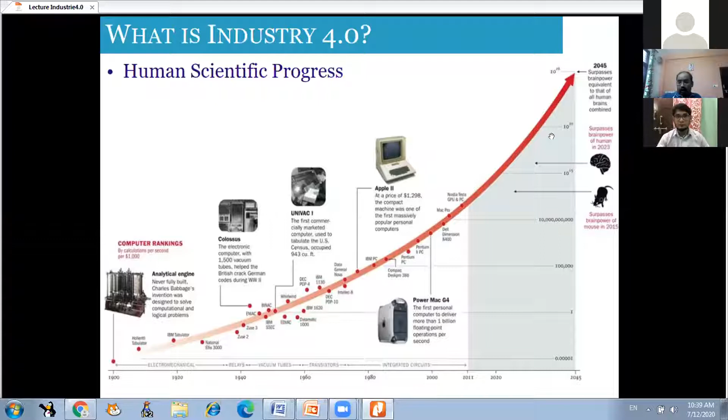So starting from the industrial revolution, we begin with Industry 1.0. What is that? It is the first industrial revolution - that means the first mechanical loom. That was a mechanical loom engine developed in 1784, invented by Edmund Cartwright, a scientist from England.

Started the first mechanical loom system based on the introduction of mechanical production equipment driven by water and steam power only. This is our first industrial revolution, developed by a machine known as the first mechanical loom, developed in England. Now as we proceed, because there are some limitations, we have to achieve efficiency.

We have to minimize the losses, etc. Then as we move on, there was a second revolution. We call it Industry 2.0, based on the mass production achieved by division of labor concept and use of electrical energy. So as we move from first to second industrial revolution, the mechanical energy converts into electrical energy. All the machines we developed were in terms of electrical energy for the mass production of products or articles.

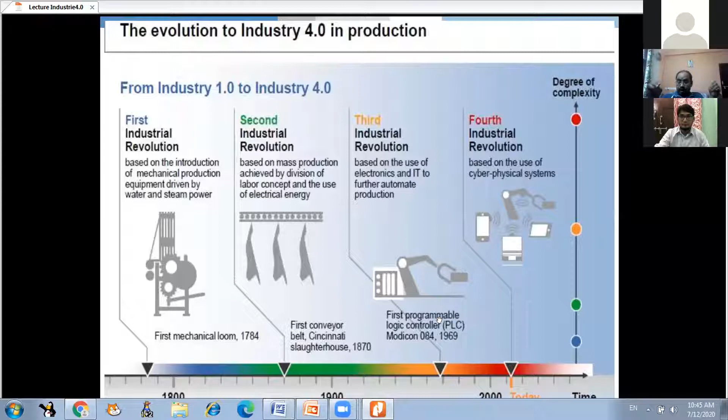Now in the fourth industrial revolution, everything is interconnected, whether you are sitting on the remote side, or you have a smartphone, you have the internet, you have the machine. That means more complexity we have to deal with, more problems we have to deal with in the fourth industrial revolution. Apart from that, it is very useful for the country, for the world, for sustaining the economy of the world.

That is what Industry 4.0 is.

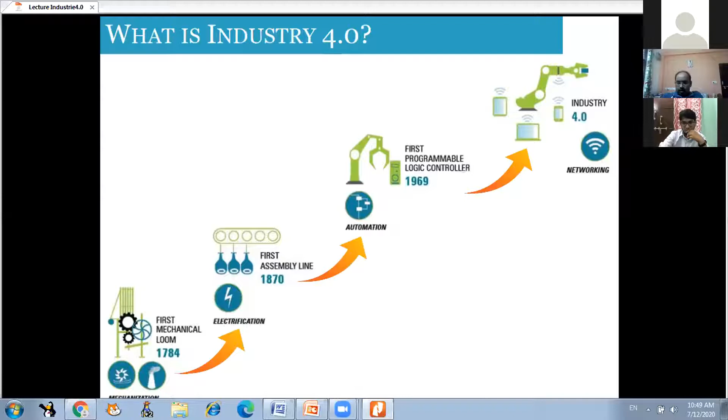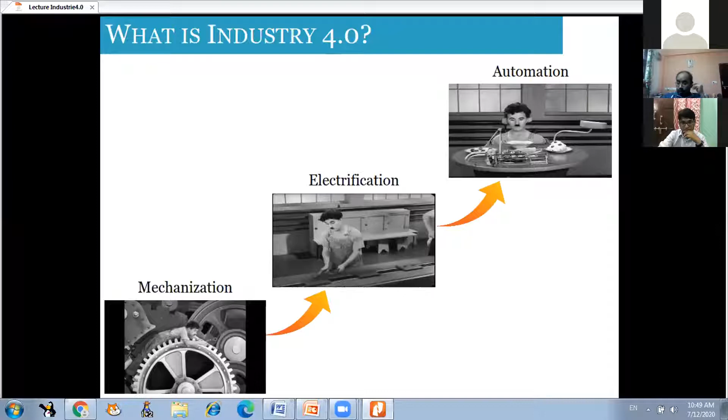Now what does Industry 4.0 mean? Mechanization starts from mechanical work, that is the mechanical loom. Then we shifted to electrification. Then we shifted to automation, Industry 3.0. But now in Industry 4.0, we are shifting to the cyber physical system, the interconnectivity of the cyber physical system.

What is the need for Industry 4.0? It's a heavy need in industry because India is a developing country, and we have to sustain in this economic world. We have to compete with other countries. Other countries started using Industry 4.0 in 2015, and we launched it in 2019, after 4 years, because we have to compete with all countries in order to sustain our share of the world's economic growth.

Why do we need Industry 4.0? Because of shorter lead time and product life cycle. Lead time means the time between initiation and completion of a production process — the time needed to start and end production. We have to shorten the lead time in order to make the industry more efficient and quicker, and we also shorten the product life cycle.

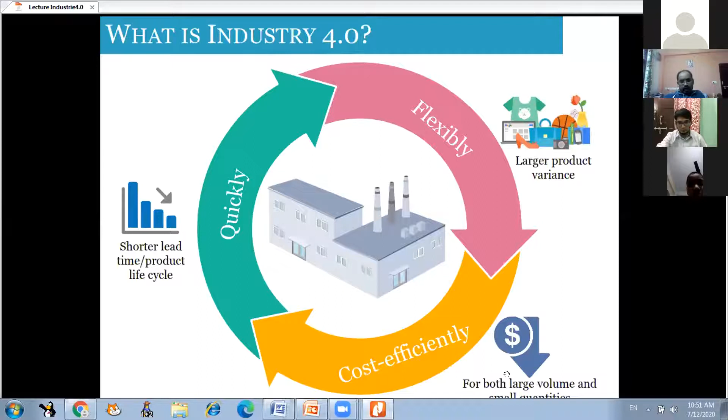Larger product variance for both large volume and small quantity require Industry 4.0. This is the framework of Industry 4.0: digitalization, automation, connectivity, and analytics. We have to club together what the customer needs. It is directly connected with the suppliers, manufacturers, and logistics. Whatever the customer needs, there is a direct demand sent to the manufacturer, who manufactures the product as per customer requirement. The customer can also monitor the progress of whether the product is being manufactured as per their need.

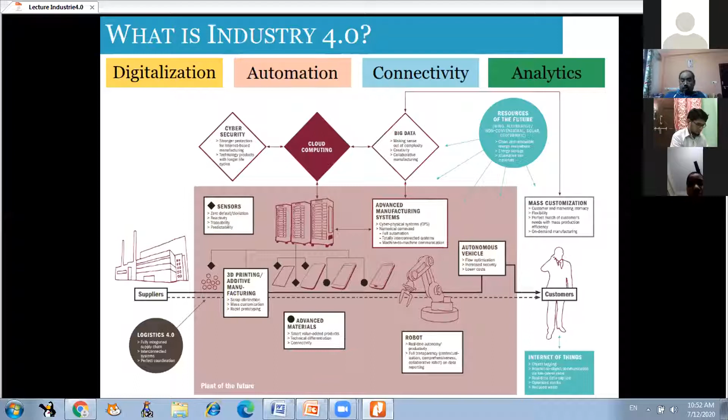There are so many concepts, including cyber security, cloud computing, big data, and advanced manufacturing systems. All the systems are interconnected in Industry 4.0, so we have to club all these concepts together.

Now we have a classical five-layer automation architecture. We have the sensor and actuator at machine level, which sense a command and actuate it via actuators - this is the machine level or station level, using PLC, the programmable logic controller. Then cell level uses SCADA, supervisory control and data acquisition. Then process level uses MES, the manufacturing execution system, at the process control level. Then we have the factory operation management level, using enterprise resource planning.

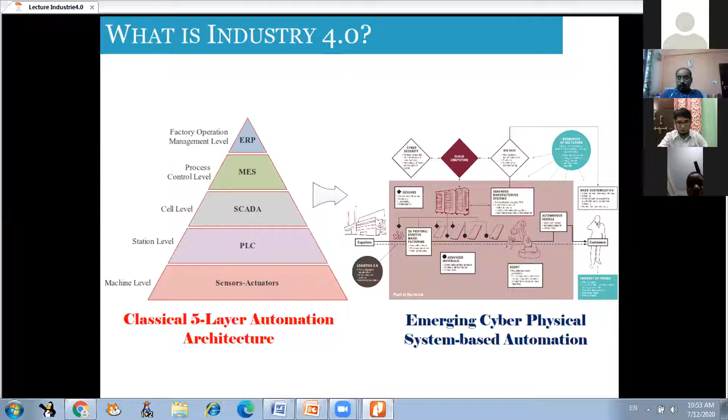All of this is connected with emerging cyber physical system based automation - we call it emerging cyber physical automation. Everything is connected with the cyber physical system. So this is Industry 4.0.

That means smart machines, service robots, advanced analytics, smart factory, big data, and IoT are all components of Industry 4.0. We need IoT, big data, smart factories, advanced analytics, service robotics, and smart machines.

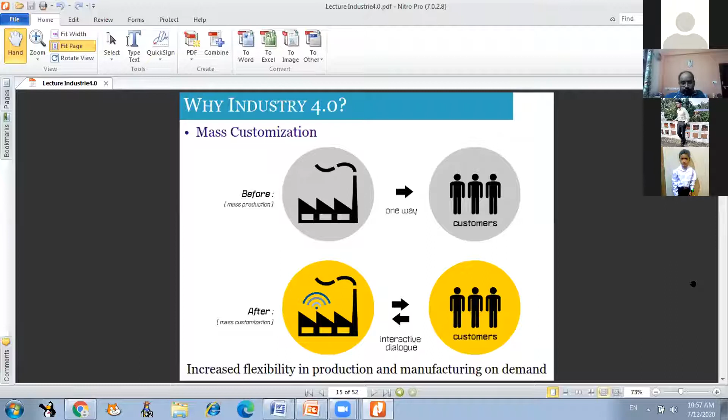Earlier, mass production was one-way to the customer - whatever products the industry produced, they just shifted to the customer. After mass customization, it's an interactive dialogue with the customer - whatever the customer thinks, they can achieve as per their requirement. That means increased flexibility in production and manufacturing on demand. Whatever the demand of the customer, we can go by flexibility. We have to achieve increased flexibility in Industry 4.0 for faster production.

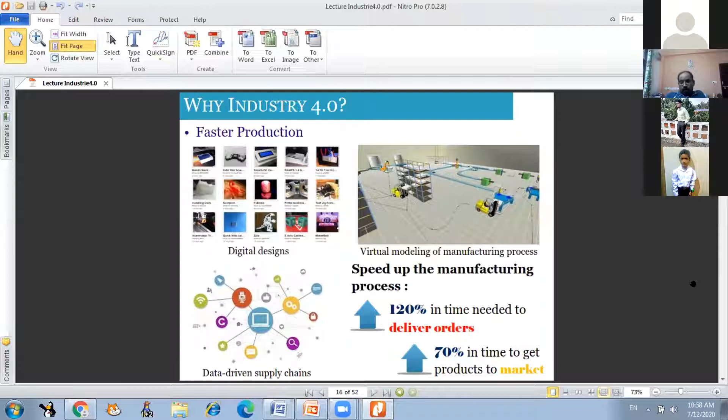This is a simple example of faster production: 120% increase in time needed to deliver an order, 70% increase in time to get products to market - this is an analysis from some person. It's just a forecast that if we implement Industry 4.0, we can speed up the manufacturing process and reduce time to get products to market by 70%. So Industry 4.0 means better quality too - you can see the number of defects per million units: in 1989, suppose 500 defects; in 2015, after Industry 4.0, just 12.

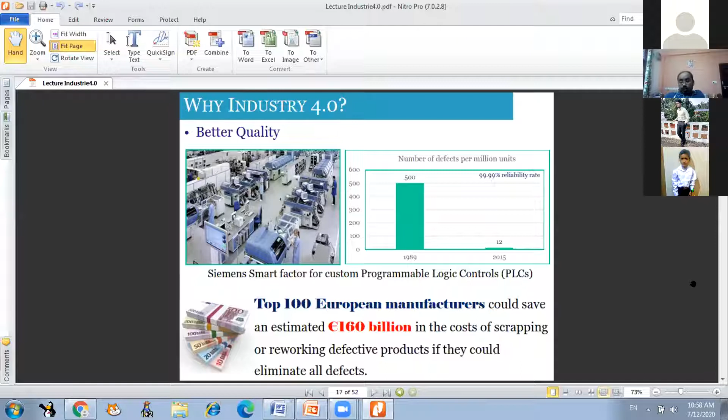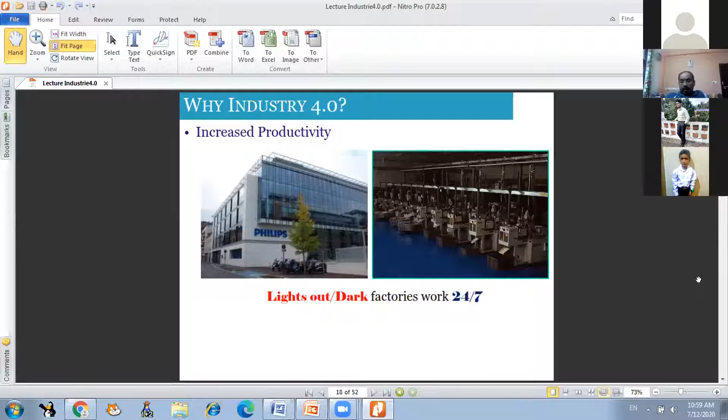99.99% reliability rate - this is the Siemens Smart Factory for custom programmable logic controls. That is Industry 4.0. Better quality we can achieve. Increase productivity, light out dark factories work 24/7. Light out and dark factories means it is fully automatic industry without any involvement of the worker, involvement of humans. That is unmanned industry. They can run 24/7 for increasing the productivity.

Predictive maintenance, it is very important. Increase productivity, that is what we can say Industry 4.0. Main issue in the earlier industry 3.0, 2.0 is that we have to halt the manufacturing for the maintenance, and if you're halting the manufacturing line, then obviously there is loss of productivity. But that loss we can overcome in Industry 4.0.

The machines are interconnected with each other, and if you have a line of machines, one machine can sense what is the error in some parts of the machine, they can self-repair the error, self-repair the wear by changing the tool, by changing the part, so that they can maintain themselves. So in this predictive maintenance, they avoid machine failures on the factory floor. That is 50% decreased downtime, 20% increased production, and it is called predictive maintenance.

In Industry 4.0, all machines are interconnected with the cyber world, physical system cyber world. So they can sense whatever is required for the machine for smoother, continuous flow, and they are interconnected. If one machine can sense the breakdown, then automatically all the machines will be stopped until the initial machine can recover itself. So it is a sharing economy, Internet of Things.

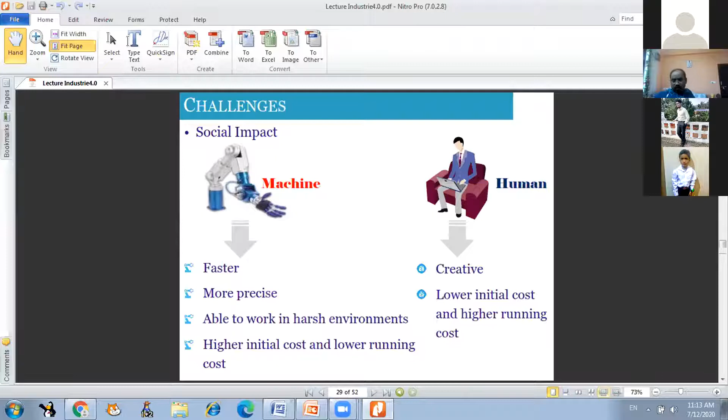Now this is Internet of Things - smartphones, for example. Everything gets smart by 2025 in India. We have smartphones now, smart homes maybe in 1 or 2 years - some already have smart homes in big cities, metro cities, smart cities. Now we will have smart cars, we have smart factories. So we have to push the technology and pull the market as per the world scenario and world economy to survive in the world. Everything will be smart.

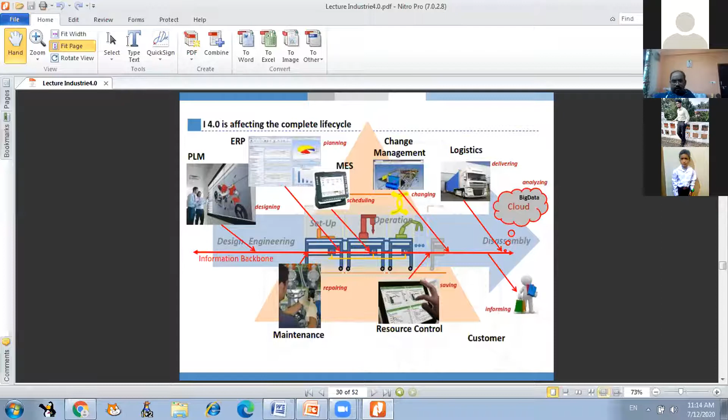This affects the complete life cycle - these challenges have already been discussed. Smart products: the product to be manufactured has all necessary information for every step of its production. That means we have smart products.

Can you imagine that if we have to fill a jar with 2 liters of liquid in a machine, we have a chip in the jar that can sense itself whether 2 liters is sufficient - sense means everything is automatic with some intelligence on it, they can judge. Then we have the autonomous production facility, a network production facility that takes into account the entire value chain, so we have the development phase.

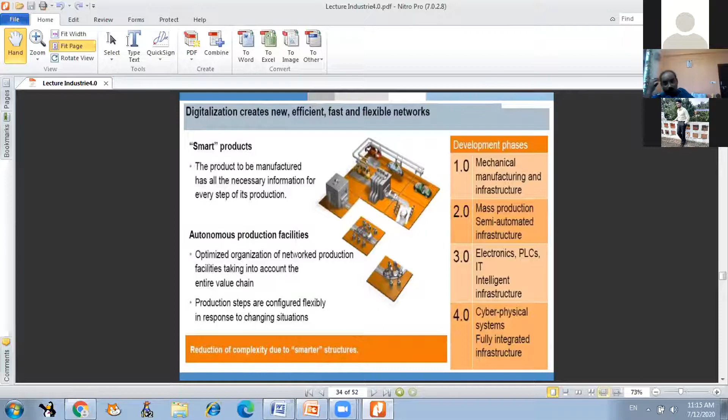It's all discussed. Now coming to our country - why should India invest in this program? It is a very big challenge for our country to sustain in this globalization. So what we need is to stay ahead. We need smart solutions - it's essential for our economy, so we have to sustain.

But what is the meaning of 'we'? We means all of us together, not a single person - we the engineers, we the academicians, we the researchers. We have to work together to transform Indian industry from 3.0 to 4.0, so as to sustain in the world of globalization as per the current scenario.

So we have to change the syllabus structure, we have to change our machines, we have to change our scheme of examination - everything we have to change so that we can train people as per Industry 4.0. India today is in a leading position in production of goods as well as production of equipment.

We must stay ahead. The world market is undergoing rapid changes: labor cost, quality demand, individualized product, shorter product life cycle - that means we need smart solutions. India must keep production in India, or even get production back from low-cost countries. It is very important for our economy.

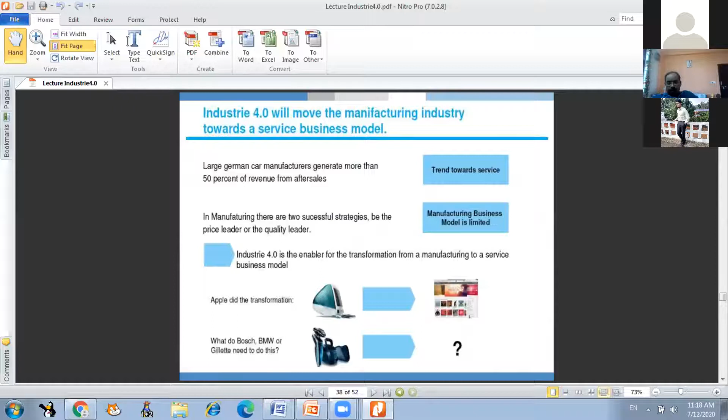Industry 4.0 will move the manufacturing industry towards service business. In service also we can implement it in every field. So Industry 4.0 is not just a word but action.

Smart factory is a similar concept to Industry 4.0, this smart factory concept used in the United States. We call it smart factory. So these are the main things we have to consider.

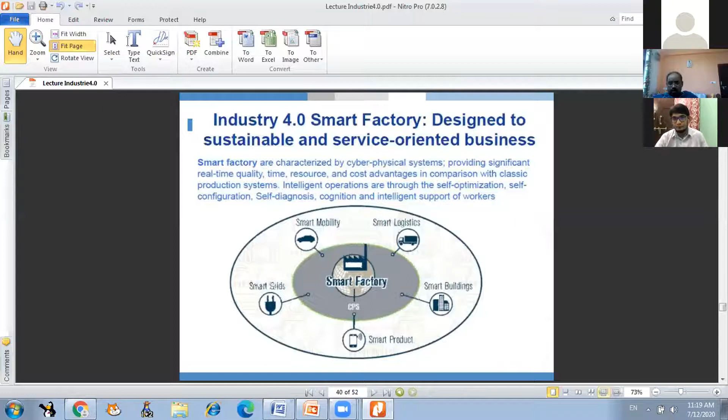It is designed to be a sustainable, service-oriented business. We have smart mobility, smart logistics, smart buildings, smart products, smart grids. Everything should be smart. This is just a view of the smart factory, with no man, no humans.

The opportunity of Industry 4.0 is based on cyber physical systems and internet of things. Today we are shifting towards cyber physical systems and the internet of things.

Suppose you have a smartphone, and there is a website called Lenskart. You can customize your lens glasses as per the shape of your face, as per your suitability. That is Industry 4.0. You order on Lenskart, and the exact same frame will be delivered to you within 2 or 3 days.

That means there are so many advantages of this. You need not store the inventory of the products. Just as per the customer demand, you can produce and deliver to the customer according to his customization. This is one example, a look of that smart factory.

Smart manufacturing is the future vision, same concept. It is integration of data with process expertise to enable evidence-based management of manufacturing. So it is different from conventional manufacturing, this smart manufacturing.

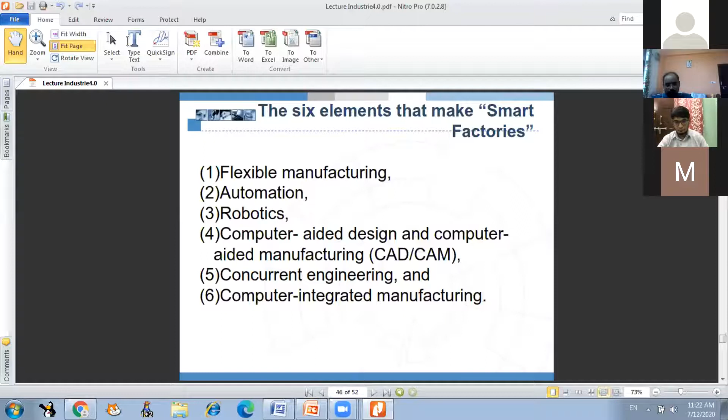And we have to interconnect it. We have horizontal communication and vertical communication in Industry 4.0, machine to machine communication, top level to low level communication. In concurrent engineering, we have to compete, everybody is running, we have to compete. Concurrent engineering, flexible manufacturing.

Flexible means with the same setup, same plant, we can change the product easily. So it is flexible manufacturing. It is a manufacturing system that can produce a variety of products on a single production assembly.

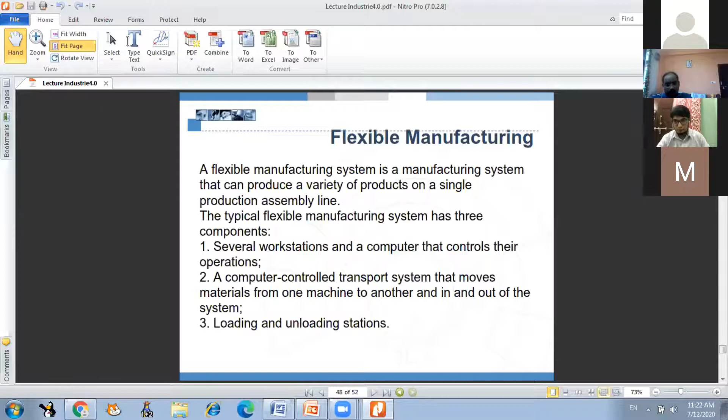The typical flexible manufacturing system has 3 components: several workstations, a computer that controls their operations, a computer controlled transport system that moves material from one machine to another, in and out of the system, and a loading and unloading stations. This is flexible manufacturing, computer integrated manufacturing.

We all know barriers and enablers. There are so many barriers: incorporating and integrating customer intelligence and demand dynamics, the need for greater affordability due to high cost.

Operator usability, protection of proprietary data. Data is proprietary, maybe proprietary, and security of data is a must. System interoperability, etc. As for enablers, in-house integration is one thing we need for Industry 4.0, along with addressing these barriers.

Outcomes, very important. What is the purpose of Industry 4.0? Main purpose is mass customization, ability to meet customer data demands, openness, visibility, traceability, and ability to participate in the smart supply chain concept.

Smart supply chain means you know where your item is, what you have ordered, and where it is. Like nowadays with Amazon or Flipkart, the moment you order, a message is delivered to your phone that it is packed and dispatched. This is the number you can track. So it is a supply chain network where everyone can know where the order is and how long it will take to reach the customer.

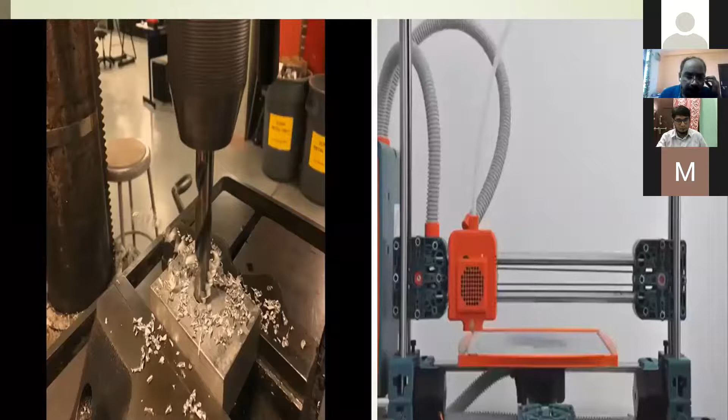Now, in smart manufacturing, we use rapid prototyping and 3D printing techniques, which we call additive manufacturing techniques. In our department, we have 3D printing machines, and students are working on various projects, including MTech and PhD thesis work on 3D printing, which is additive manufacturing.

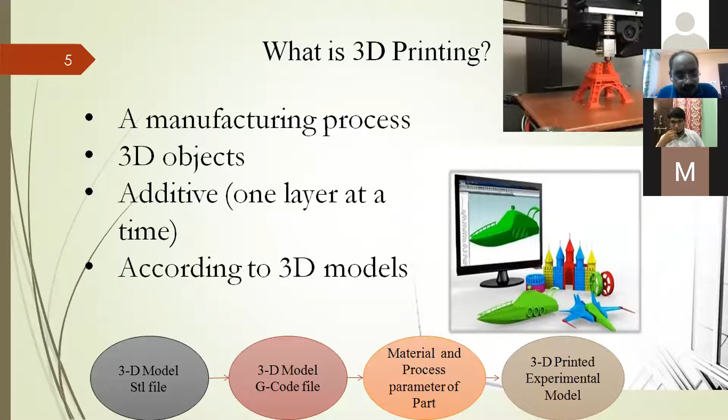This is a sample. These are related to the inventor of 3D printing, Chuck Hull. For 3D printing 3D objects, we have to scan the object as per your requirement, like whatever size of shoe you require. If you have a shoe size that is not standard, you can manufacture it with additive manufacturing by scanning the shoe model, and the same object will be prepared by the 3D printing machine. This is a product we manufactured in our department.

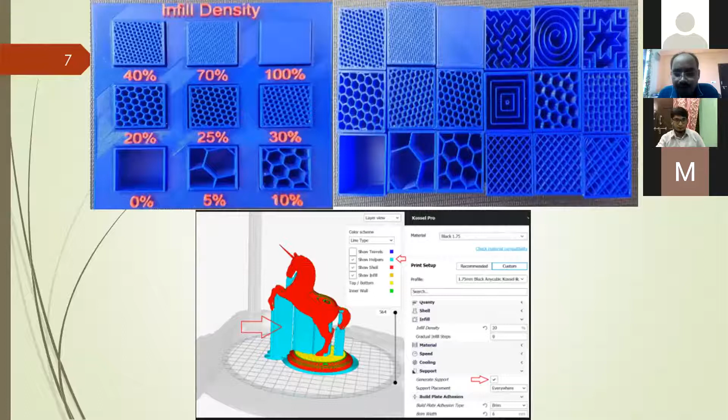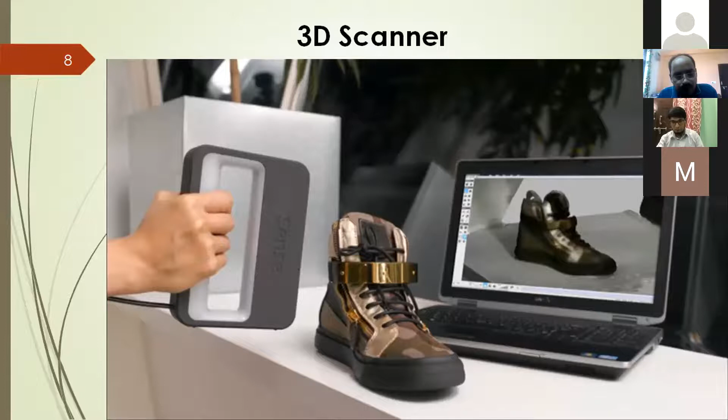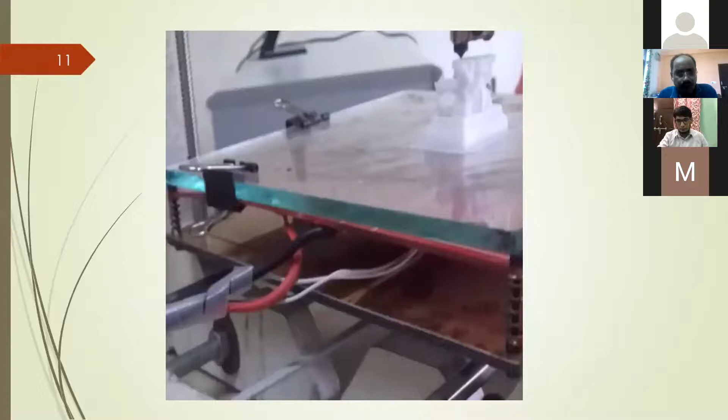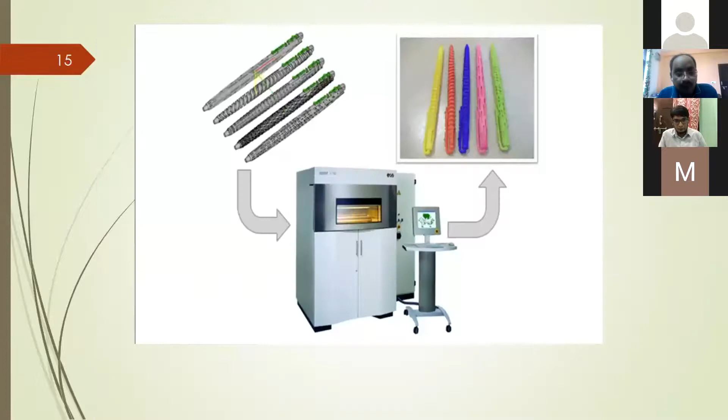There are so many types of 3D printing you can study online; it is available there as additive manufacturing. This is the machine in our department. The production process is a basic concept, it is model-based and complexity-free, with no complexity. Any complex job can be produced with the help of 3D printing because it is additive manufacturing, with no losses of waste material.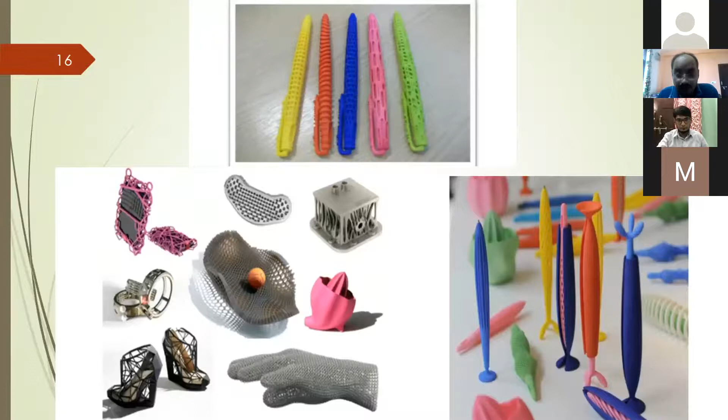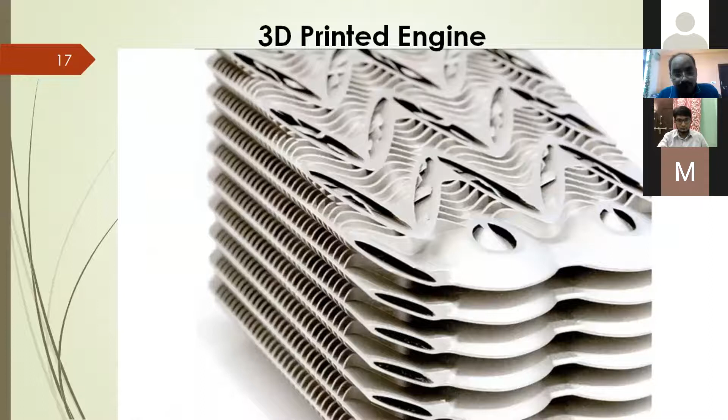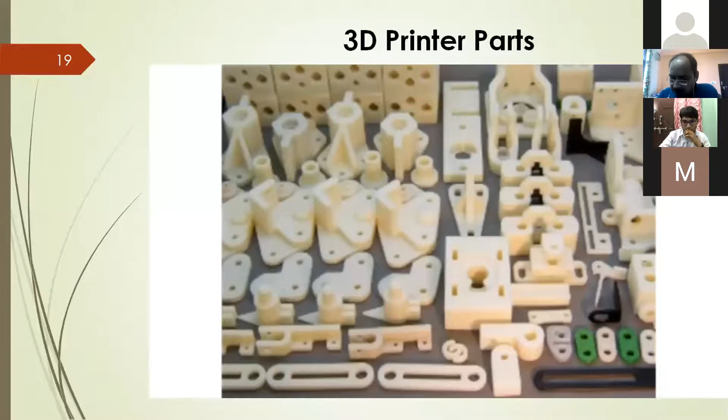For example, pens from additive manufacturing - these are examples. Additive manufacturing is a basic component of smart manufacturing; without it, you cannot call it smart manufacturing. Any type of product, even highly complex ones we couldn't produce before, we can now produce with additive manufacturing, like 3D printed engines which are more efficient with better cooling, 3D printed structures that are highly complex, 3D printed parts, and implants, which are very important nowadays.

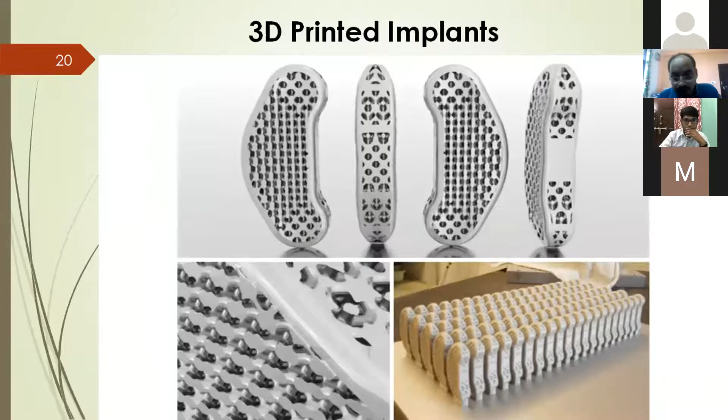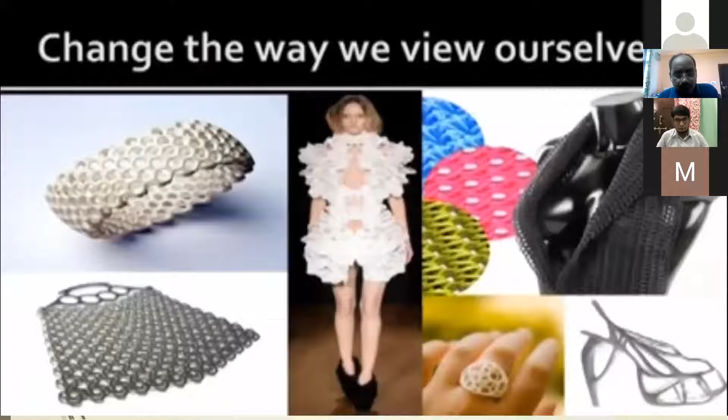Implants - we have needed implants for the last two years. We are importing implants from foreign countries, like joints, etc. These are examples. As per customer demand, whatever the customer needs, you can produce it with the help of additive manufacturing.

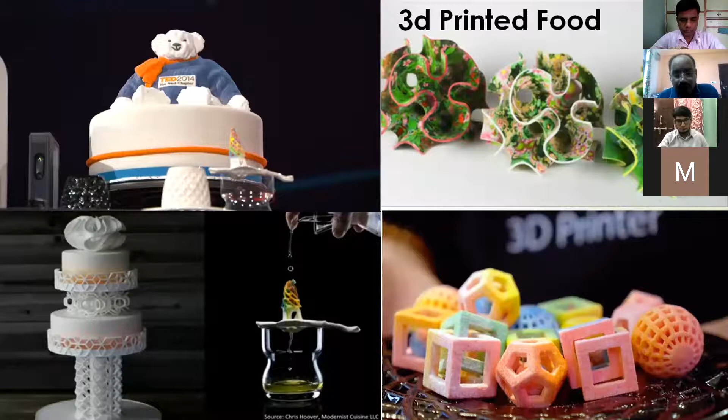Simple example: goggles, these are product cases. Whatever case you like, as per requirement, you can produce it yourself with the help of a 3D printing machine - 3D printed foods, whatever shape you like, like a burger, as per your preference.

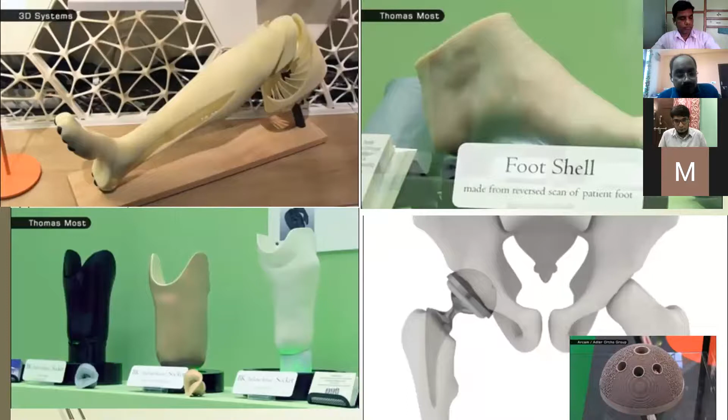Prosthetics - earlier, if a fracture took place in our bone, it was very difficult. Now we have 3D printed prosthetics, very lightweight as per the material. These are some examples of additive manufacturing products.

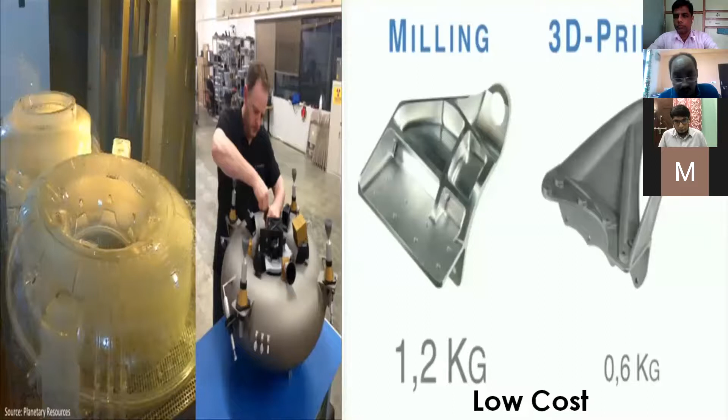Milling versus 3D printing - the main difference is in the weight of the material and cost of the material. With 3D printing, cost can be reduced because it is additive manufacturing, not subtractive. We can save a lot of material too, so many examples.

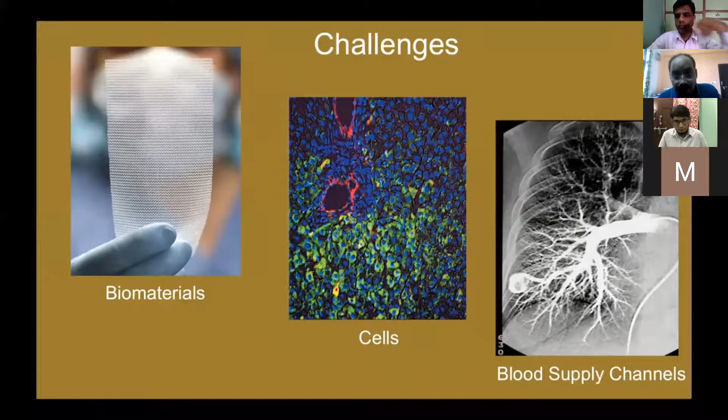This is a challenge: biomaterials, cells, blood supply channels. We are working on these biomaterials, shifting towards that - it is a major research topic. Biofabrication - you can fabricate parts of the body, like the heart, kidney.

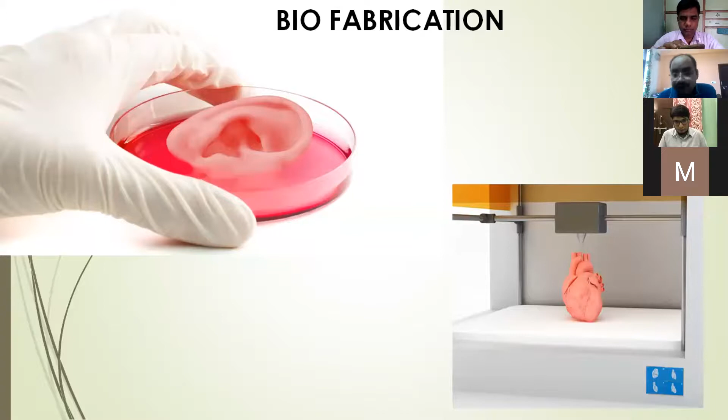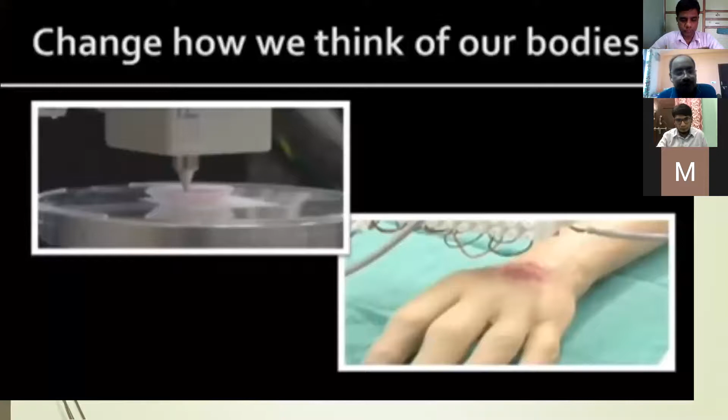Practicing in pre-surgical treatment, same thing. Whatever look you like, whatever face you like, through 3D printing you can change how we think of our bodies. 3D printing, it's all about this.

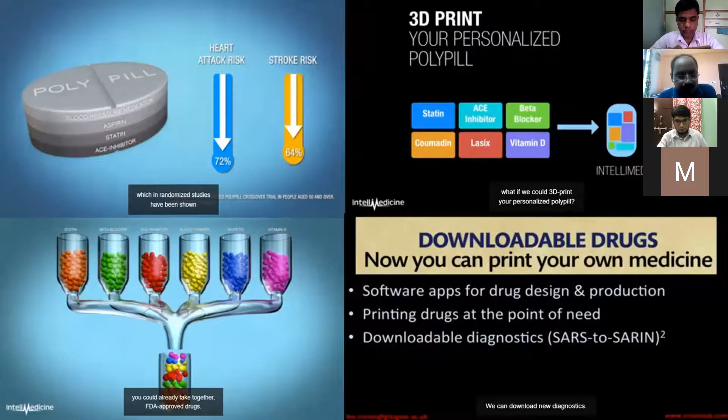Pills - we can manufacture pills with different salts: aspirin, statin, ACE inhibitor, all sorts, in each case. Blood pressure medication with beta blockers. We can combine all the drugs together. So many issues, so many.

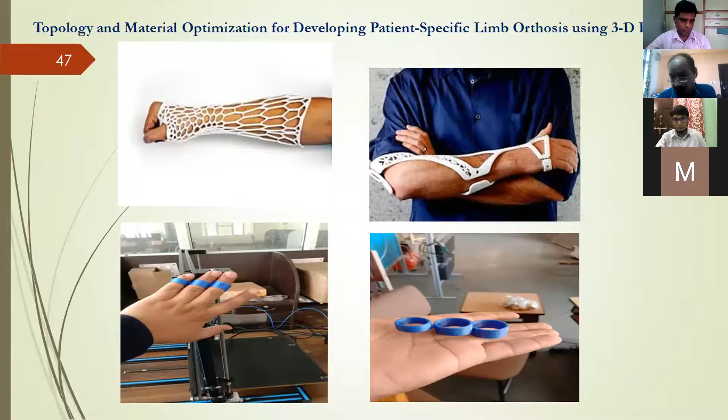Ultimately, you need more knowledge. You have to update with the technology and not stick to conventional technology in order to sustain in this Industry 4.0 era, which will take another 5 years to understand the important principles and techniques of Industry 4.0.